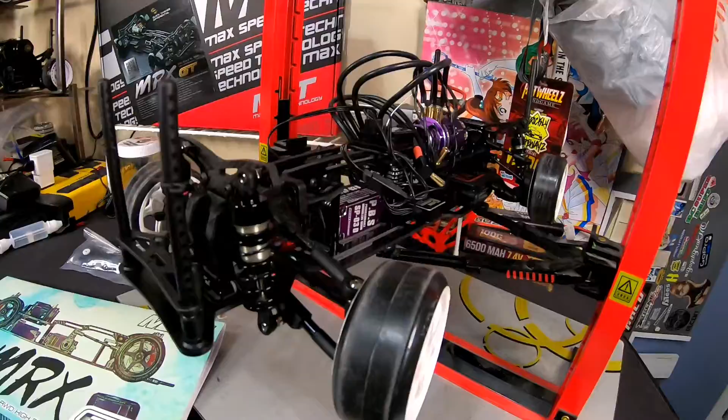You are looking at the MST MRX GT on a cool hoist that I just got in a trade - should talk about that later, but right now this is a Constructor's Digest, and I'm going to dive into the manual and talk to you guys about the build, give you tips and info about what you should look out for and stuff that they forgot to put in the manual.

I can tell you this car from the shakedown video, this is it, fresh off the track, and it's so good. It is so good out of the box. Everyone needs to drive it. It's just so good.

So we're going to talk about that, and I'm going to point out things on the chassis, and if I have to take it off the hoist I will, but hopefully I won't. So with that, let's dive right into the manual.

First thing you'll notice is the manual looks really good. I really like this, they really went to great lengths to make that look really nice. Okay, so MRX GT manual.

Okay, I'll open it up. Move stuff out of the way here. So here we get an exploded view of the car right away, which is pretty nice. You can see everything that's going on the car in terms of what goes where and part numbers and all that stuff. So handy. Tools you'll need.

These are tools they give you. This is stuff you should have in your toolbox, especially this guy - very handy. So anyways, if you don't have those, go get them.

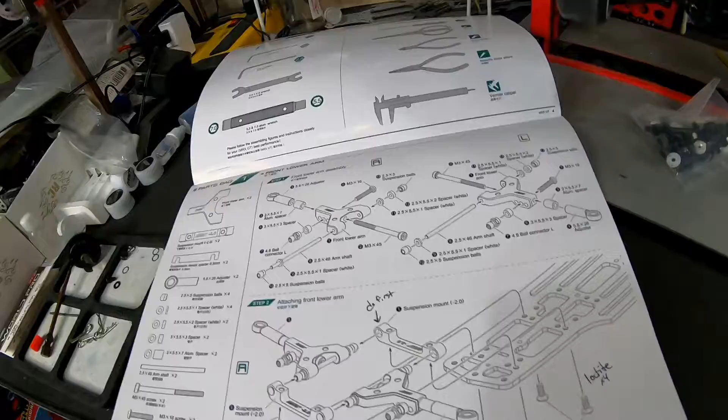First page, parts bag 1. We will start building the car here, and you can see there's a good amount going on, but just take your time, don't rush it.

What I will tell you is these spacers here that just say spacer, those are the black ones, and the ones that say white are obviously the white ones. Just want to clarify that, and definitely check here in the lifelike diagrams for the right parts for the right spot, because it's very important you put the right things in the right spot.

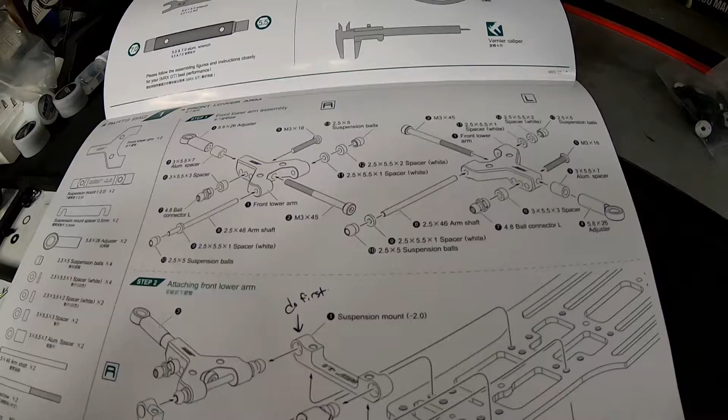And they have put things into numbers here - see the numbers, these black numbers? Those are the numbers you should assemble the parts in. So front lower arm, screw, spacer, ball cup, so on and so forth. Yep, that's that, pretty straightforward.

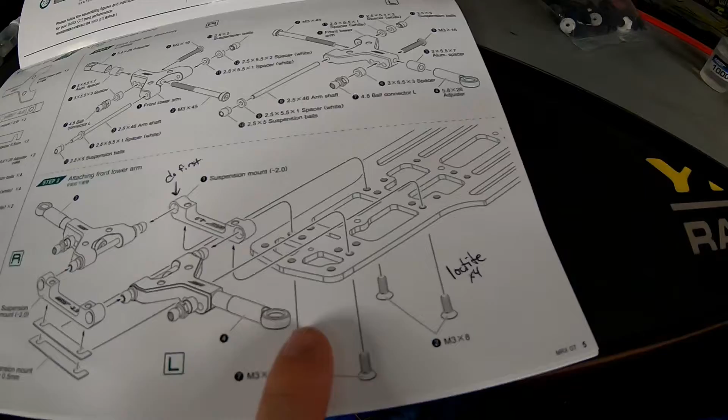You might want to put - I forgot to write it here - but you might want to put some Loctite on that screw and that screw so that those ball connectors don't come off. When you go to attach the lower front arm, do the back one first, install that first, and don't forget to Loctite these screws because you're going into aluminum, so that'll keep them from getting loose and coming out. It's a good idea.

And a trick to do the shims for here, the two 0.5 mil shims, put the screws into it with a few threads, and then slot those in once the screws are in. It makes your life a lot easier than trying to hold it all together and screw it in.

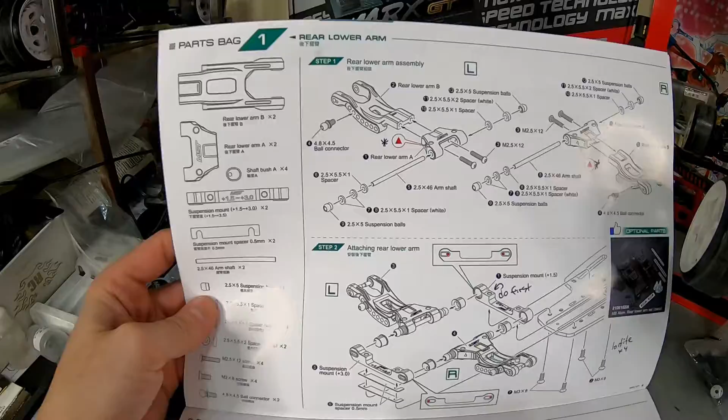So then we come to - we're still in parts bag 1 - and we're here at the lower arm assembly. There, that's better. Lower arm assembly, and we can see that there's more going on here. So a lot of the sort of same stuff from the front arm.

There's my ring lights. Actually, I'll put this down - that doesn't look that good. Yeah, so that's that, where are we here?

Make sure you pay attention here for this stuff, because certain spacers need to go in certain spots. Now these pieces came stuck together with their two-piece. If you pull them off to take a look or whatever, or put the adjuster piece in there, which we don't need right now, but you can put them in.

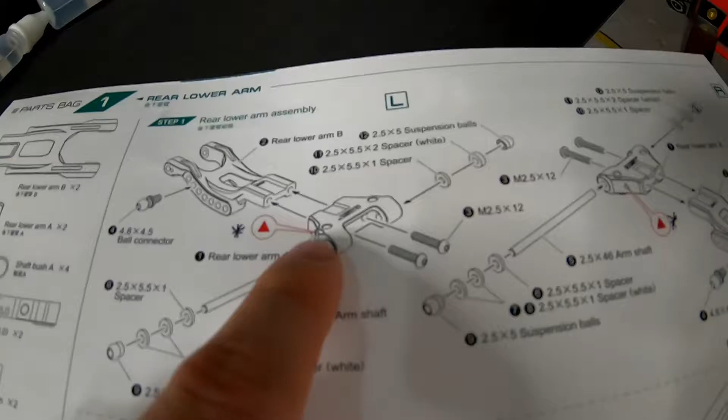This piece here, see that triangle? It's on the side there. That triangle looks like that, on that orientation - that's how you can tell which way is correct orientation for that. So in case you get that messed up, put those screws in first, 1, 2, and then there you go.

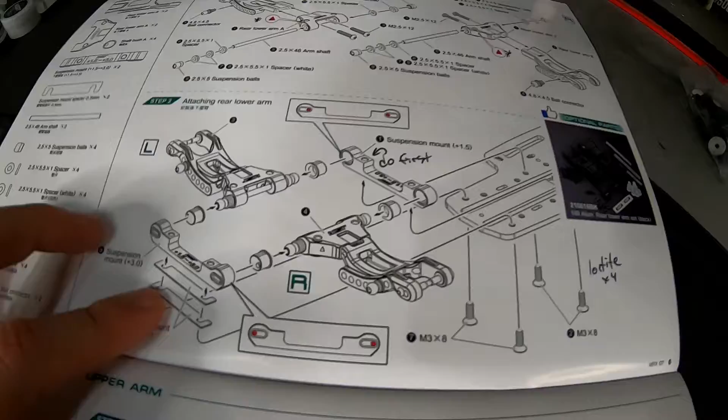Same with that side. Once you get those assembled, move down to the rear lower arm and do this one first. Don't forget to Loctite them all, and same with the shims here. Take your time, just put a few threads in, then slot the shims in after. Makes your life way easier.

Take note of the dots on this part, the shaft bush. See that little dot there? You'll want the one with the dot, not the one with the long line, like the minus line. You'll want a dot, okay?

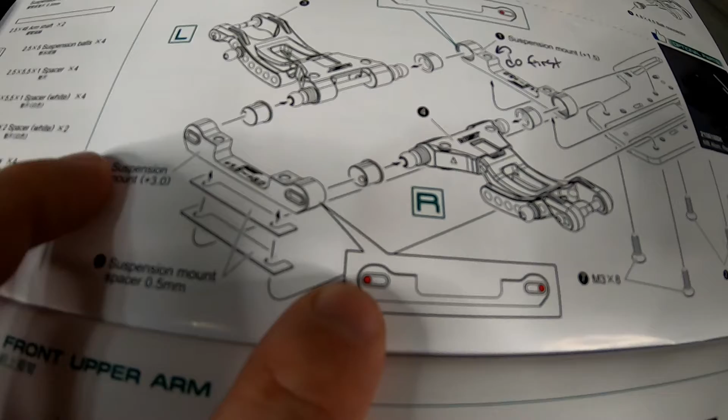On the frontmost rear suspension mount, this one that goes here, see the dots? You'll want them inward. This dot represents where the hole is, so we want the holes inward on this side for the ball stud. On this side, you want them on the outside so the arm is pushed outwards. Just take note of that and you'll be fine.

Easy peasy. Parts bag 2, the front upper arm assembly. So here we go, assemble 2 of those, measure that in between 11.3 millimeters, and you're good to go. Make 2 of them, shaft bush, okay? The arm shaft bush, pay attention to the hole and the dot.

Or sorry, the arrow and the dot, that is the orientation, okay? And back here, just pay attention to the holes, where they line up. So just go slow and pay attention to that, and you'll be fine.

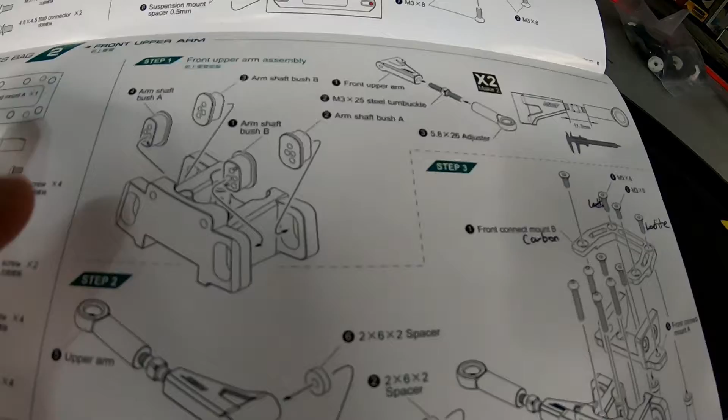This part, when you put the pin in between here and here, I just took this part and stood it up end on end and slowly slotted in my pieces. Put that on first, then the arm, then slot that one in, easy, and away we go, okay?

And here I made some notes. This brace is a carbon brace, which is really nice. These are aluminum posts, so put some Loctite on those 2 into the aluminum posts, that's what I like to do. Okay, and that's that, pretty straightforward.

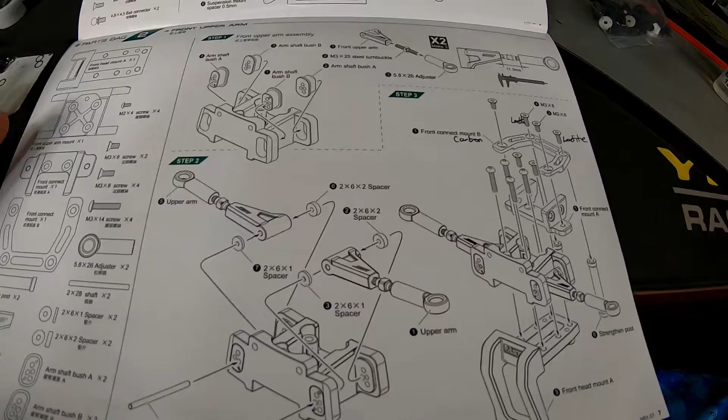Oh, and this part comes from bag 1. Now, you'll have some parts that kind of go back and forth, but they will tell you what the deal is there, okay? So that's that.

Now, steering arm assembly. There's not too much going on here, but it does look like it. They're all ball bearings, make sure to put some oil in them wherever it says ball bearing, okay? And make sure you orient that correctly, the screw holes. Put some Loctite on that screw for the ball stud so it doesn't come out. The rest of the stuff you're screwing into plastic, so that's okay.

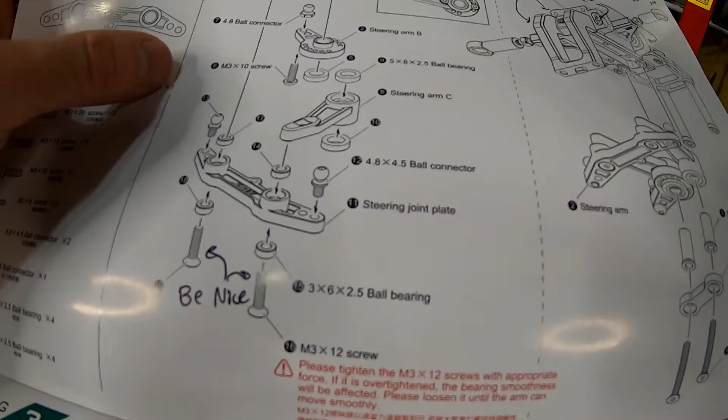With these screws, I wrote 'be nice,' so be nice on the torque into here. Just barely snug them up, because you're making threads into plastic. So make simple threads, don't use a power tool, just go by hand and make nice snug threads, because you don't want these too tight on the bearings or it won't move freely, and you need this to move nice and freely, okay? So just make it snug so the bearing moves nice and freely. You're good to go, that will be good.

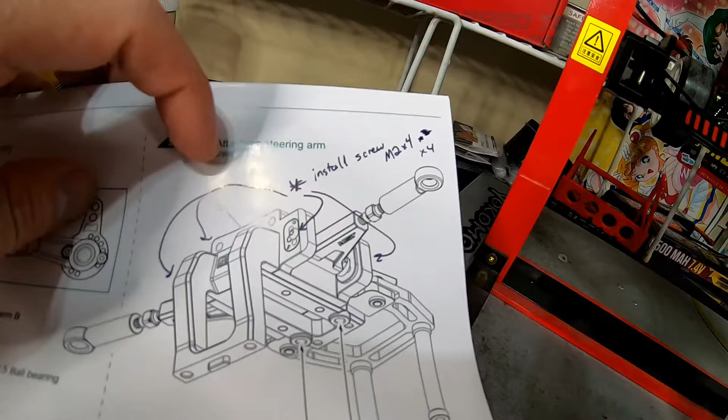And here, I actually noticed that MST forgot to write on this bulkhead assembly to put the 4 M2x4 screws here, here, and on the back side of the pin there, and on the other side, okay? So don't forget to do that, or those pins on the upper arm will come out. I've seen it happen. So yeah, 4 screws there, you go.

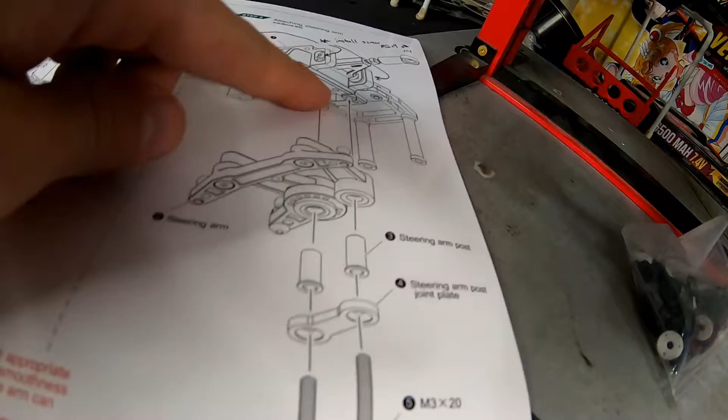When you install the steering rack with these pieces and these screws... oh wait, no, this is going into plastic, so again, screw it in nicely, nice and snug, and we should be good. If that was aluminum, I would say put some Loctite on it, but I don't think that's actually aluminum, let me just check. No, that's going into plastic there, so that's fine. But this is aluminum, so put Loctite on there on the other side, and then yeah, we're good to go.

And here, this is what I meant. So you see in there, that slide rack, or that steering rack part right here, this part. Yeah, so don't tighten that too much, okay?

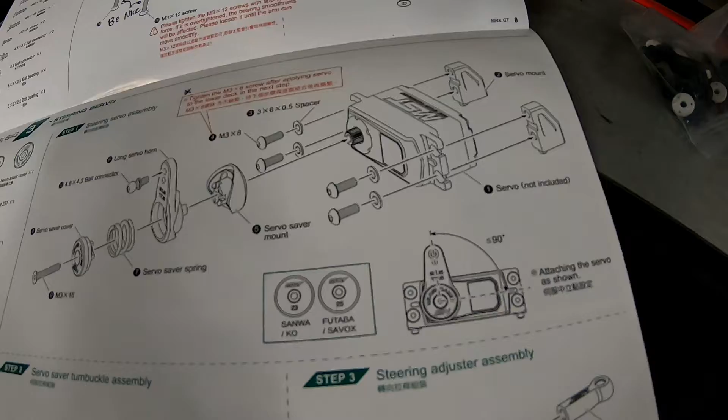That's that, okay so here we go. Straightforward servo saver, which works really good, so go with it. It does work really good. I like it so far, this new version MST one.

These screws, when you go to put your servo in, leave those a little bit loose so the servo has a little bit of play, because you'll want some play to pop those mounts in, and it'll set the servo between the mounts nicely, then you can tighten those up. I made the mistake of tightening these as tight as I could, close to the servo, and I was like, why doesn't it fit? I could see I just had to move the servo over a bit, so I loosened both, wiggled it until it popped in, and then tightened all the screws.

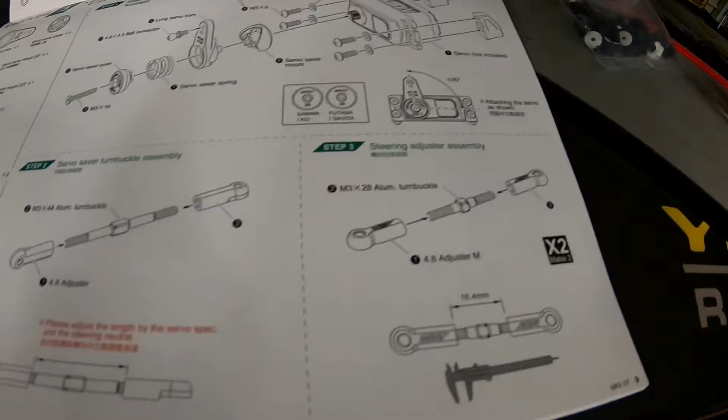We're good to go. Then down here, make your servo saver turnbuckle and the steering adjuster turnbuckle, the tie rods basically, and the big guy right there. Those are straightforward. You'll have some extra screws, I noted 2 extra, and some extra bits throughout. That's normal, just make sure you double check each step and don't rush.

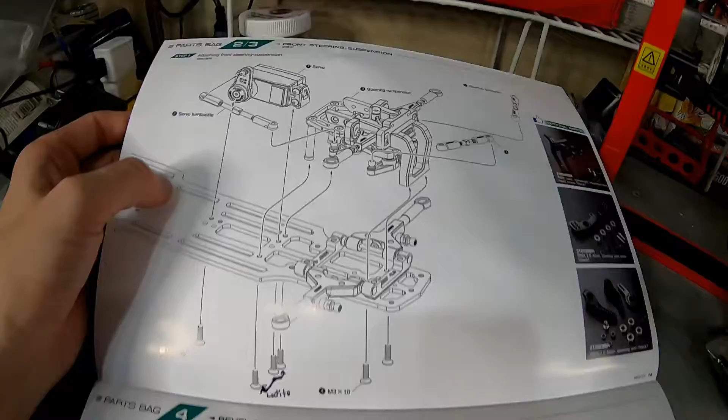Front steering suspension install, that's where the servo goes into those holes. So like I said, leave these screws a little bit loose and it'll fit in there nicely, then tighten that, and install the front bulkhead with steering. Install all the screws into plastic, straightforward, and the 2 that go into the aluminum posts there, put Loctite on the bottom of those and you're good to go.

Install your steering turnbuckles. Okay, good to go, love it.

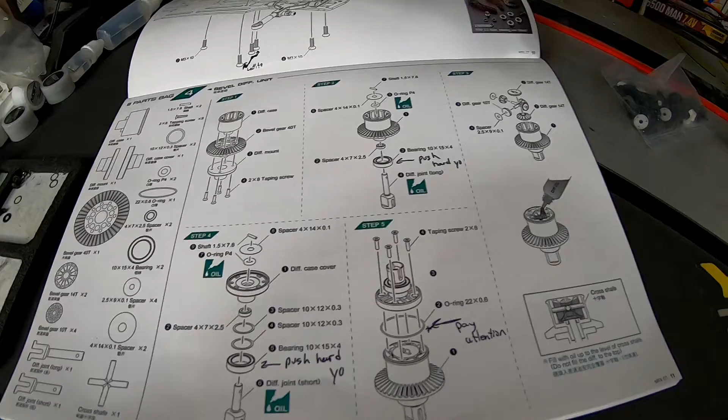Now the diff. Some other manufacturers pre-assemble the diff and you just put oil in it. MST wants you to build it so you understand it fully. And it's pretty straightforward, and I will use that phrase quite a bit.

Just pay attention, this all clips in. These screws are self-tapping, but they also require a Phillips screwdriver, not an Allen head. So they require a Phillips, or some people call it the star head. It's a Phillips, okay, and you'll need a PH1 Phillips for that. Just go slow and they'll go in no problem.

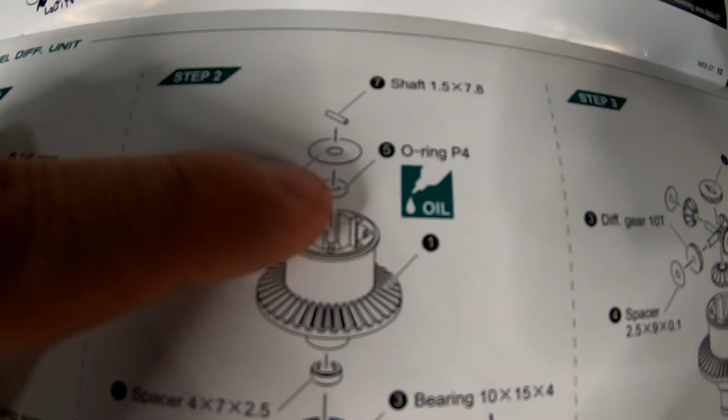Don't forget to put some oil on that O-ring before it goes through the shaft. This is where you'll press the diff bearing onto the housing. I wrote push hard, yo, because MST's tolerances are quite good, so that is a nice firm fit.

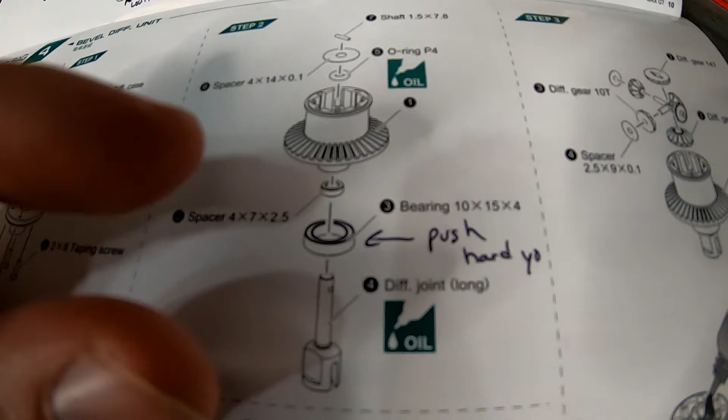Just make sure you push that as far as you can get it, push, push, push, get it on real nice, because I didn't have mine on as far as I thought they were supposed to go, and they wouldn't fit in the diff case until I gave them a little more push, squeezed them on. Then my diff fit in the diff case nicely with nice tolerance. So just remember that.

So this is where you install the gears with the bottom bevel gear. Don't forget to put that spacer in, you can use pliers to do that because it's tight in the diff housing. And don't forget these shims on all 4 of those gears, not that top gear, just those 4 gears.

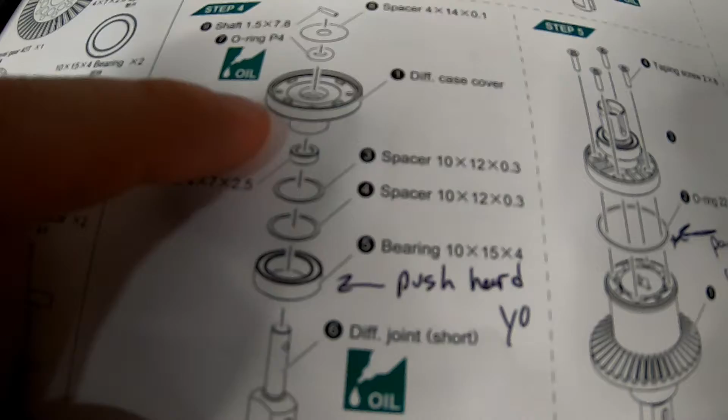Here's a little tip, when you're doing this part, again push hard, yo, same thing, push hard in the same spot. Note the spacers and oil on that O-ring before it goes through the shaft. And the pin, you can put a little bit of oil onto that pin area and stick that top gear onto there, so when you flip this part onto the diff, it'll stay there a few extra seconds and go right in.

It's mint. And when you put this ring on, pay attention. Put this part on slowly and make sure the diff ring is sealed nicely in there and fits in there nicely before you put the screws on, or it will spit out the side. It happened to me, I thought I had it all in there. So just take your time with that ring and make sure it's on there nice.

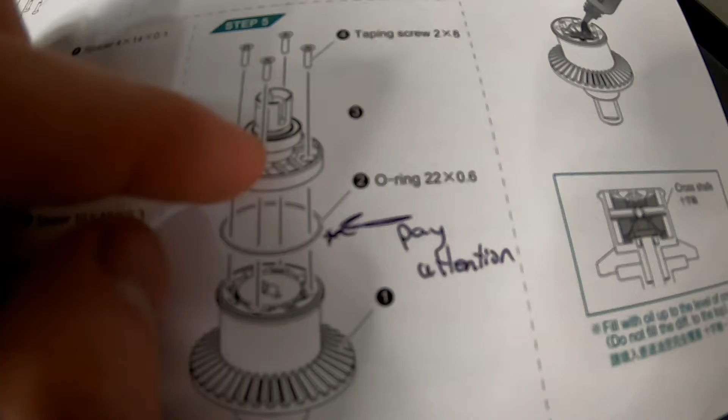Your diff won't leak, because I don't think mine's leaked yet, or at least I'm going to check it at some point in the quick release section and we'll see. So just take note of that.

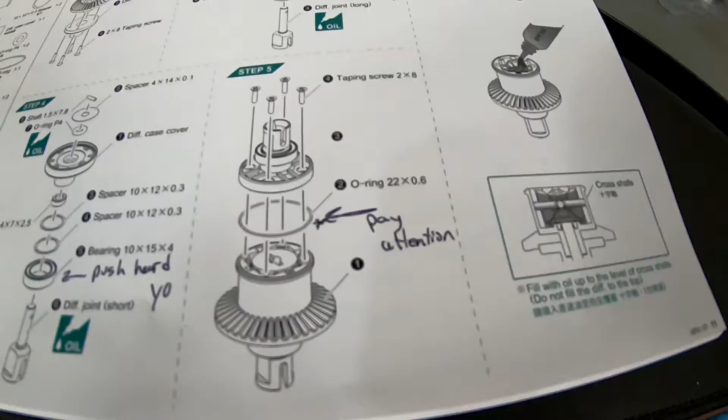Don't rush it, okay? Oh, hold up. So when you do these gears, do these gears, and then do the oil fill. I forgot to mention that. Fill it with the oil up to the amount they're saying here, okay? Don't overfill it. And then prep this, because any bubbles will kind of work themselves out of it. Prep this, do your thing, and then put that on with the O-ring. Just take your time, and make sure that's filled with oil before putting that on, okay? I missed that part. Gotta make sure I get that.

Now, where are we here? Ah, the rear gearbox. Yes, I enjoyed doing this. This was cool. This brought back classic MST gearbox memories and all kinds of cool stuff. So this is where the real FD fans will really love this. And if one of my friends is watching, he's gonna want this on his car, and it won't fit, but he wants it anyway. I don't know, but it's pretty cool.

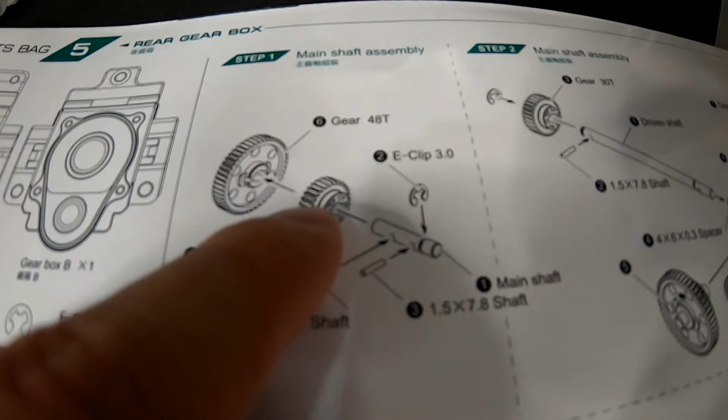So take your time. There's 2 different length shafts here that they want. Put the E-clip, first gear, that little shaft, put the first gear against the E-clip, and then put that second gear on that second shaft. Now they said it on the other page, assemble it in the order of the black number. So 1, 2 E-clip, 3 pin, 4 gear, 5 the shaft, 6 that gear, okay? And then here, shaft, pin, gear, E-clip, bam. And spacer on the other side.

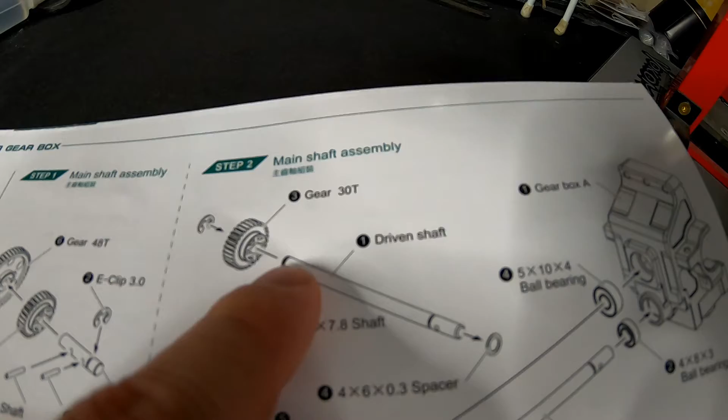It goes up here, okay? So it goes behind that gear. And then you will grab the beautiful aluminum rear of the gearbox, or front rear part of the gearbox. Gearbox A, yeah. And you will take this assembled gear piece, stick it into that bearing, into there. When you move your thing around, this might fall out. That's okay. There's nothing holding that in. That just sits between the motor mount and the rear gearbox, but on bearings. So don't worry if that pops out.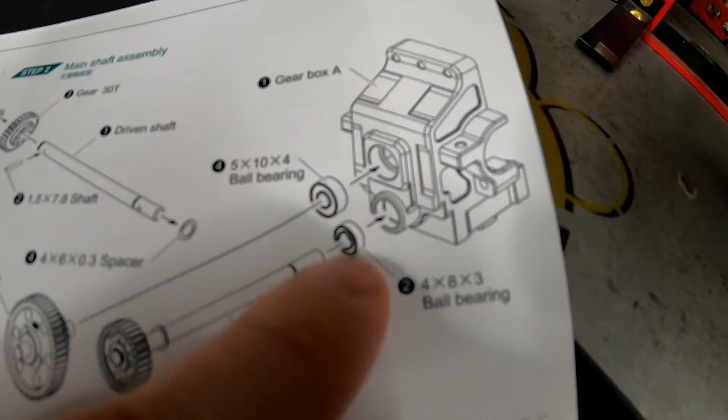And then take your shaft with the spacer and put it into that bearing, and those bearings are different, as you can see. Bring this down to here. This is where you install the diff, and make sure again that these bearings are pushed in. Pushed in as much as you can, because the tolerance here is very tight, and I like that. The MST's tolerance has always been really really good. Make sure that's in, because mine just weren't in, like half a millimeter. Got pushed hard, got them further in a bit, and then it just, oh, it went right in. So that was nice. As you can see, there's that shaft sticking out. That shaft goes all the way through there, which is pretty cool. And then

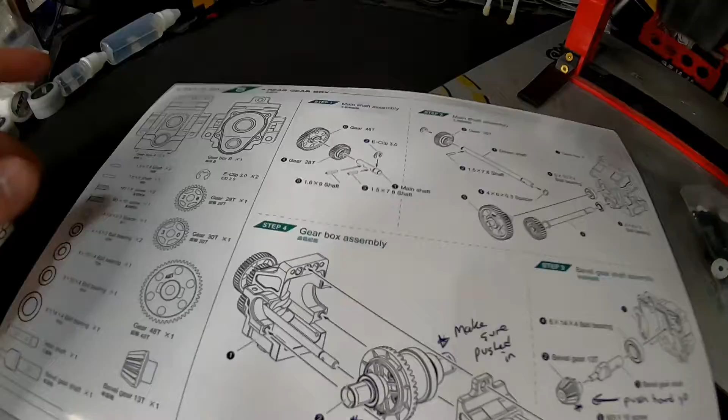So we go from here, sorry, to here. My bad, Jeebus, I wasn't paying attention to the step numbers. Excuse me. We go from here to here, okay? Because I was like, yeah, where'd that shaft come from? There to here. Plastic gear, this shaft, which I've seen before on, I think, the MRX 2s, and that bearing, put the bearing in there.

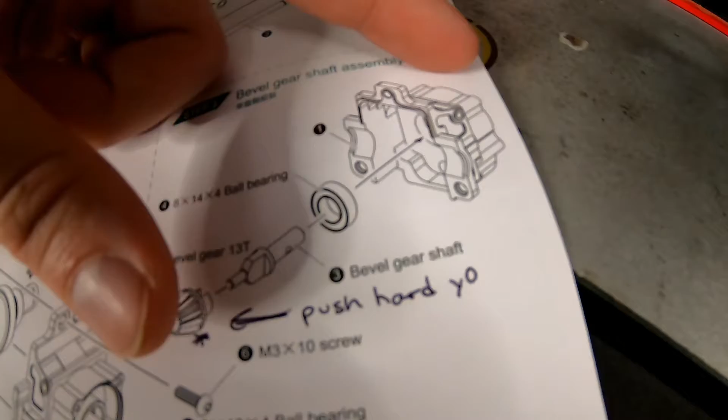Now, this plastic piece, push hard, yo. Push this, because it'll only go so far into that shaft, but push this as much as it'll go onto there, and it'll go inside the bearing. Make sure this is flush against that bearing. Push it hard, yo. Okay, once that's in there, you should see that this is protruded enough, and then take this, and this is this assembly, and install your diff.

Okay, Loctite on those screws. Whew. Excuse me, I had a little burp and a yawn all at once. Oi, I hate it when that happens. Okay, so I was saying Loctite times 3, 1, 2, 3.

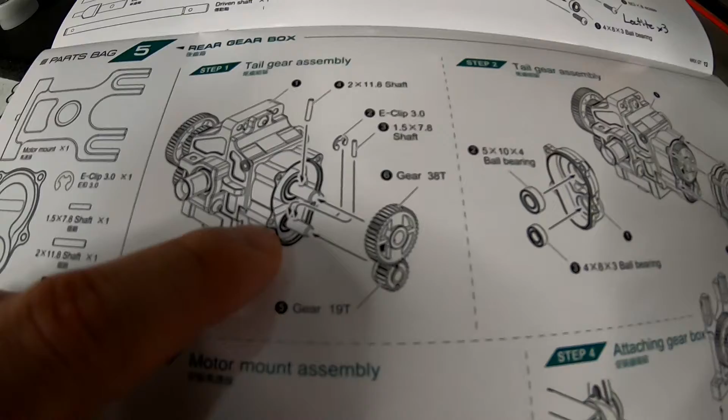There you go. Now, to finish the rear part of the gearbox, the tail gear assembly, you will take an E-clip and a pin. That E-clip will go through that shaft. Make sure that the gear up here is pushed all the way into that shaft.

I wanted to do the E-clip first, which makes more sense. That little E-clip should go right on, then that mini shaft goes in there, mini pin. The gear just slips on, slides right over the pins. Then there's that big pin, they just pop on.

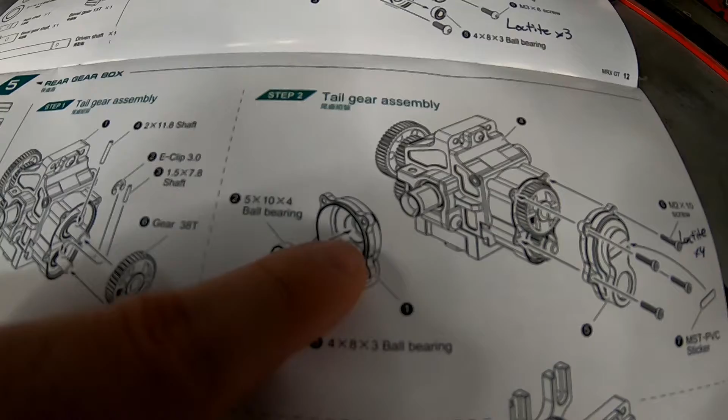And you put 2 bearings in there, put oil in them, and then those screws, Loctite, and the MST PVC sticker. I'll tell you, use the MST PVC sticker, just put it on.

I know some of us think that there might be protective film on all of them. There wasn't, and I tried to peel it. Can you see the little nastiness around the M? Because I lifted the PVC covering, and that's not a protective layer. Anyways, I can always get another MST sticker, but don't ruin yours like I did. There's no protective film on that, so just put the sticker on and leave it. It'll be mint, just take it off of its little sticker sheet. Anyways, that's that top tip from me.

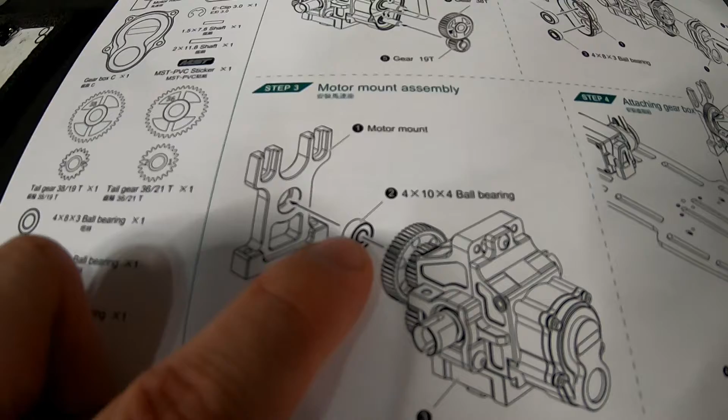And there's that ball bearing that goes into the motor mount. Yay, look at the motor mount, it's happy. Hands in the air, woo. And then that presses against that, as you can see, all one.

And 6 screws to mount the beautiful FD style rear transmission with quick change. Put Loctite on all 6 and it won't fall off the chassis. It's one of those that ain't going anywhere type things.

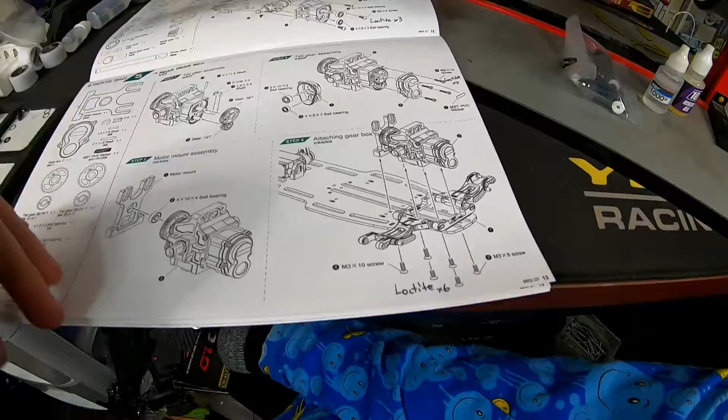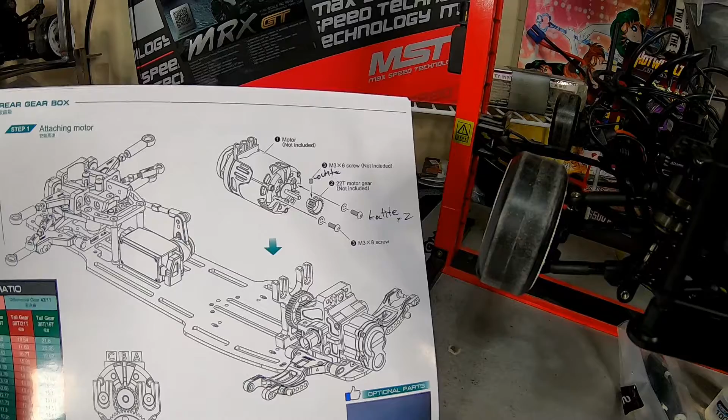You don't have to put it in right away, but there's that. But the pinion gear is not included. Ugh. But the motor screws, Loctite them twice, and that pinion set screw for the pinion gear, when you get it, Loctite it. No motor gear included, no pinion gear. I was like, oh man, come on, seriously? But then I'm like, there's so much other sweat on this car, and it does drive so amazing.

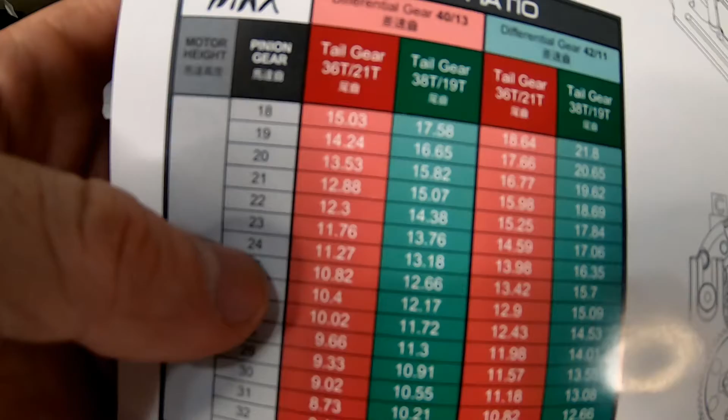I'm like, yeah, alright. So I bought a 24 tooth pinion for it, 24 tooth, and there's the numbers, so that's what we're running with.

And I'm pretty sure the 4013 diff gear, let me just go back. Where's the diff? Let's verify the diff number. Diff 40 tooth, and the ring gear, what's that, 20, the ring gear is a 13, so what's that, 4013, 40, 13. So that's the default, that's what we're running.

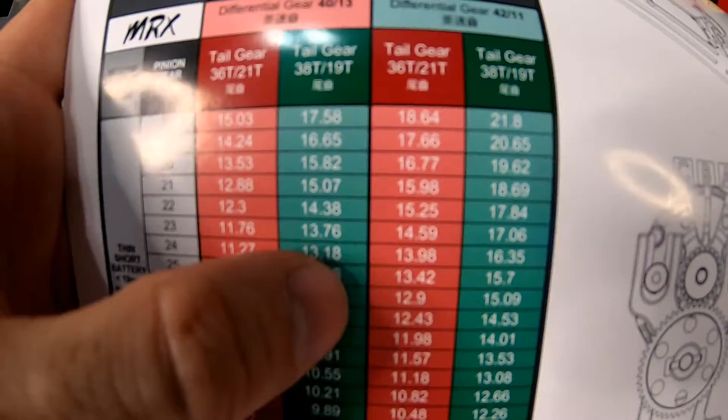24, 11, 27, 13, 13, 18. Yeah. So, you can run some math if you want. But make sure you set the mesh properly so you don't strip the gear.

That's that. Moving on. Upper deck. Carbon, carbon, love it. Aluminum, that's aluminum. We knew that. No, sorry. Yeah, that's an aluminum piece. It's right there, right there. Yes, that's aluminum, these are carbon.

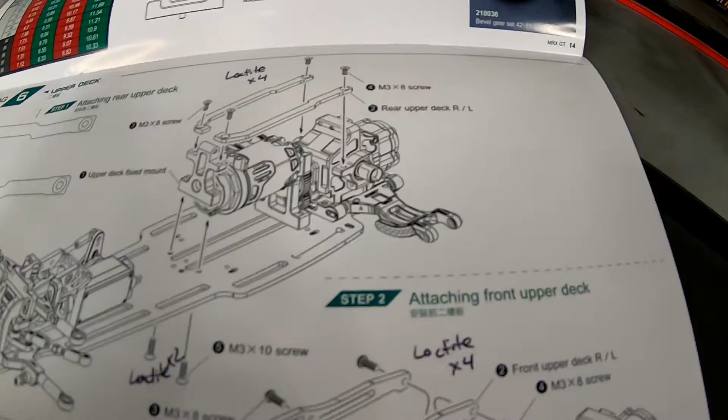Loctite all 4 of those screws because you're going into aluminum, so it makes it strong. Loctite those 2 because they're going into the bottom. Okay, and then Loctite all these screws and screws and screws, so that it makes the upper end nice and strong. And that was really nice. Look at that, look how nice that looks. Oh yes, so definitely do that.

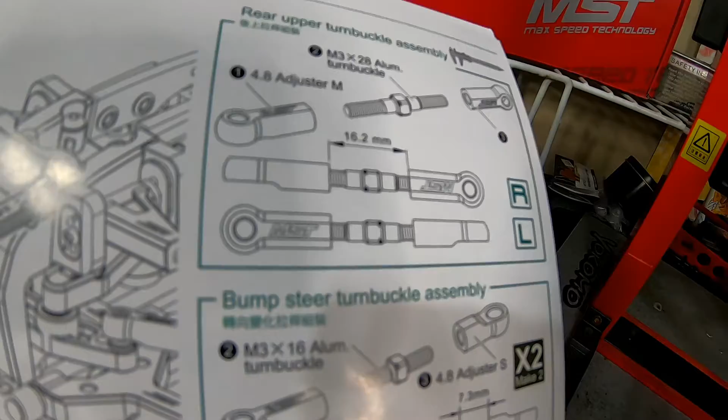Upper shock tower, make sure you Loctite on the screws for the ball studs, straightforward. Your links, straightforward, get the measurements right. 16.2 for the upper turnbuckle assembly, and the bump steer, which is the rear active toe. That's 2 of those, and you want 7.3 mil between those. So that's that.

Let's see, where are we at? Oh, rear, yeah, the rear shock tower. Oh look, they did the silly thing again, dmaper.

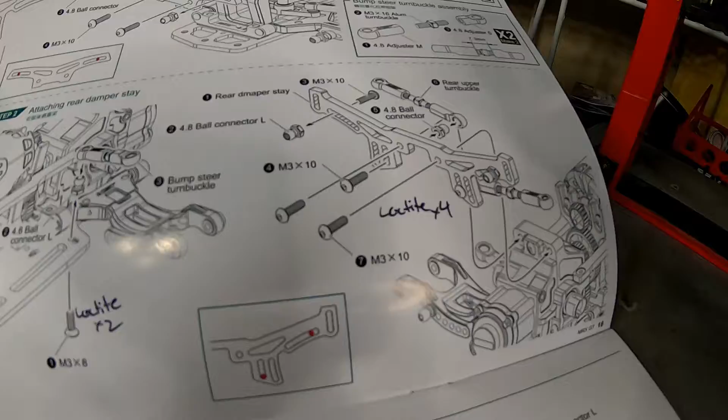Oh look, rear dmaper again. Front dmaper, yes. Silly grammatical errors, but that's that. Loctite on that screw ball stud, Loctite times 4 actually, because it's going into all aluminum, and those ball studs you'll want Loctite on, and Loctite this screw for that ball stud so the rear active doesn't come loose on you and start doing funny things.

Excuse me, I'm scratching my elbow with the camera on it. Okay, yes, that's that. And attach those balls.

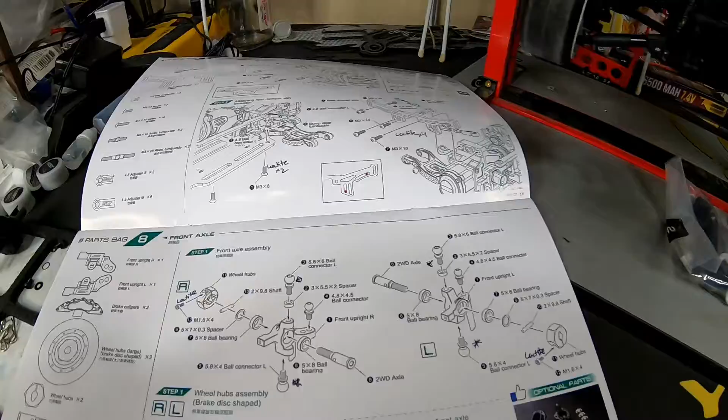Never mind. Front axle, parts bag 8, that was parts bag 7, this is parts bag 8. Sorry if I missed a parts bag here and there, but you get the idea.

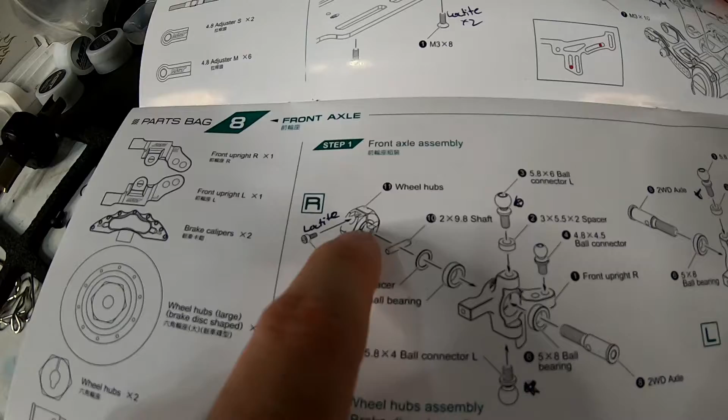Front knuckle assemblies, yep, ball studs, and there's ball bearings, put oil in them, the spacer, and don't forget that Loctite, that little screw for the wheel hub, which is the aluminum one, sorry, which is nice, use that. Here they give you the disc brake ones if you want, and they tell you how to install that if you want, but I went with the aluminum boys. Those are nice. I don't really care about the scale look on this car, and if anything, I'll get the aluminum ones, but do that. Loctite there. Now make sure you pay attention to this.

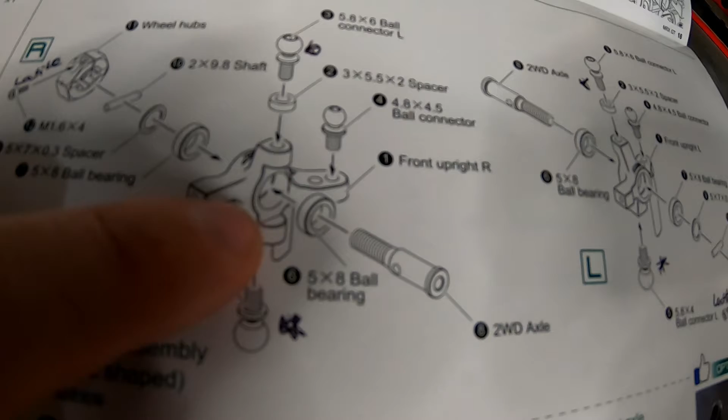5.8 by 6, 5.8 by 4. If you put the 6 in the bottom, you're going to protrude and get a little plastic dome, which then you'll have to fix by shoving the bearing in or whatever. But don't do that, don't do the wrong 5.8 by 6 ball connector. Use the 5.8 by 4, which is the shorter one from the bottom, 5.8 on the top.

Same over here, okay? Loctite that. Because I made that mistake and I was like, oh. So I fixed it though, it was not too hard to fix, but that, and then you take your assemblies and pop, okay, install them, away you go.

And these ones here are beveled, so you'll be able to put them in easier one way than the other. Same with the shocks, for that matter.

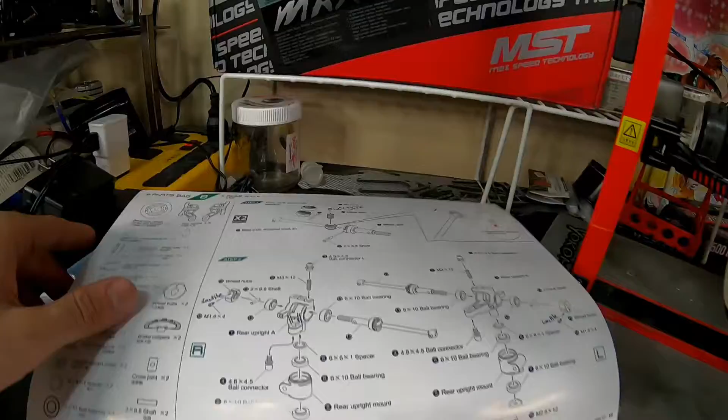Rear axle assembly, can you see that? Yeah, I put Loctite in big letters, I don't know why, I just did, because make sure you don't forget to do that. And put some black grease if you like, right there. Make sure you put the set screw on the flat part of the shaft when it goes in, and you're laughing. And then that's for the shaft, rear drive shafts.

MST makes you assemble them. Most other manufacturers pre-assemble them for you. But MST wants you to know, they want you to learn. So that's that. Rear axle upright.

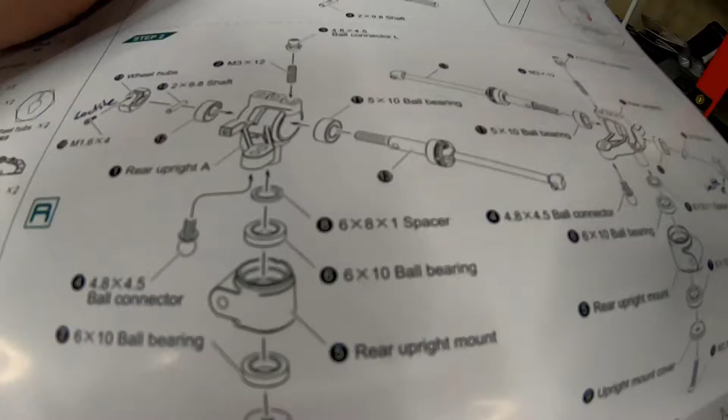These are the knuckle/uprights. Pay attention to the ball bearings and spacers, okay? Ball bearings, put oil in them. They do come pre-oiled, but you can put more. Loctite on the wheel hub, that's the aluminum one, very nice.

You can do the brake discs there, they'll show you, and you don't have to, but they make an aluminum one. Very cool.

Yes, and then, yep, what else? Throw a little Loctite on there for that ball stud. I forgot to write it, but it's a good idea.

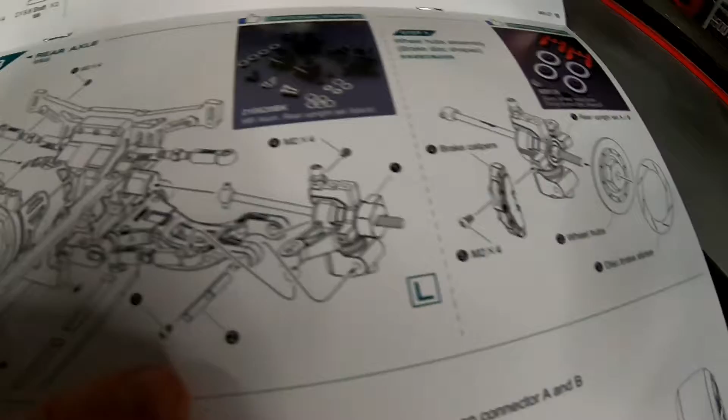And then when that's assembled, you bring those assemblies down here. You pop there, and on the other side, pop. Put your pin in and put your screw right on both sides of there in the pin. Away you go, straightforward.

And once we get here, we're getting pretty close to being finished because this just explains the bump steer there. Because the next part is the shocks. And after the shocks, yeah, we're like 90 to 95% done. So I say this is about 80% when you get to this point.

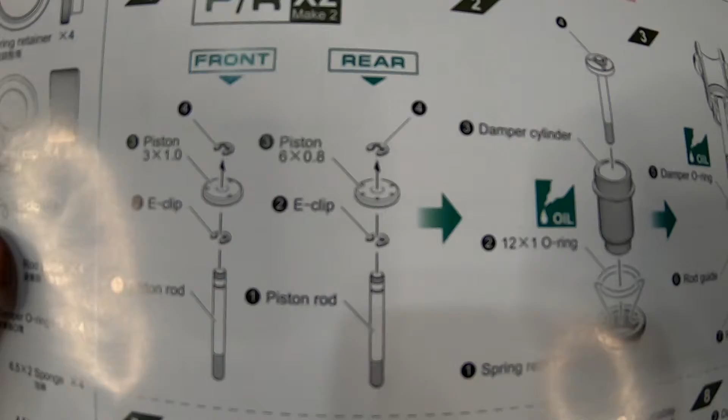So shocks, they have front and rear options, and I'm so excited to tell you that there are 6-hole pistons as standard for the rear of this car, which we're into that life now. 6-hole pistons out of the box, or in the box or whatever. So they want 3-hole pistons up front, 6-hole in the back. Okay, 2 and 2, front and rear. Now, all 4 of them, you will do.

Oh, excuse me, I burped and yawned again. What kind of combo is this?

O-ring, there's O-rings provided, all this is provided. Put the O-ring into the retainer, put a little bit of oil on it, so when you strut it onto the body, it goes on nice and easily.

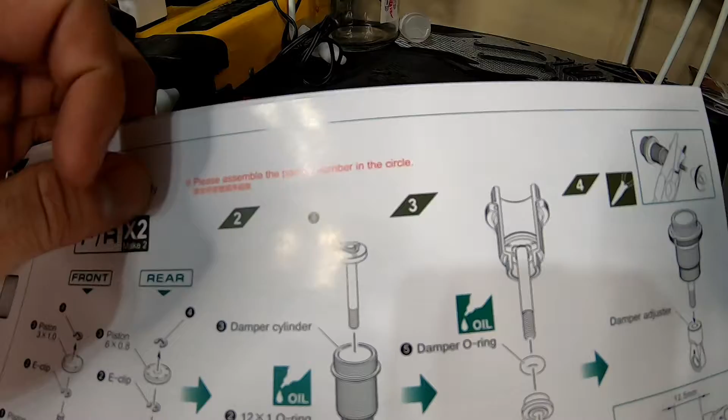Once you do that for all 4, put the piston assembly down through. This up here says please assemble the part by the number in the circle, so that's the little black numbers. That helps you a lot, so you know which to do first.

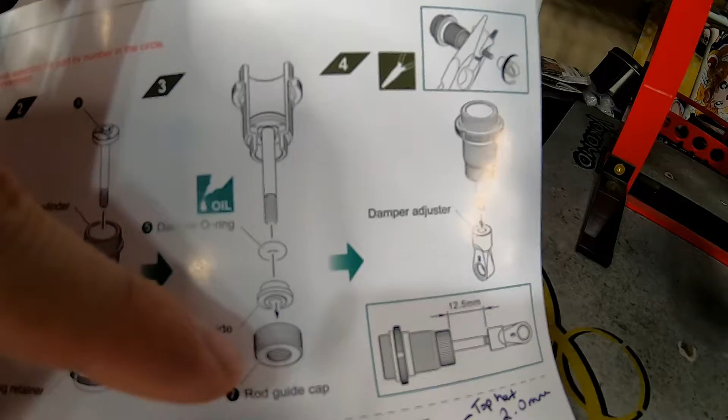On the bottom, when you get the piston in, take your O-ring, put some oil in it, and then push it through the threads. Do it slowly because the oil will help it go through without cutting it. Get it in there, put a little oil in the bottom, and then put the rod guide and seal it up, the rod guide cap. Don't use Loctite though, just tighten it with your finger, okay?

Here they show using pliers to hold the shock shaft for the ball cup. If you have your shock shaft pliers set, which I have but they're not out right now - shock shaft pliers are the best because they don't have teeth and they can just clamp the shock shaft. That's ideal, but that's what you do if you don't have them. You can use side cutters on the top thread and put the side cutter in between the top thread. That works as well, it's an old school method.

Measure that 12.5, like that. I did, and use the ball cup with the number 3. And of course they tell you all the parts to use over here.

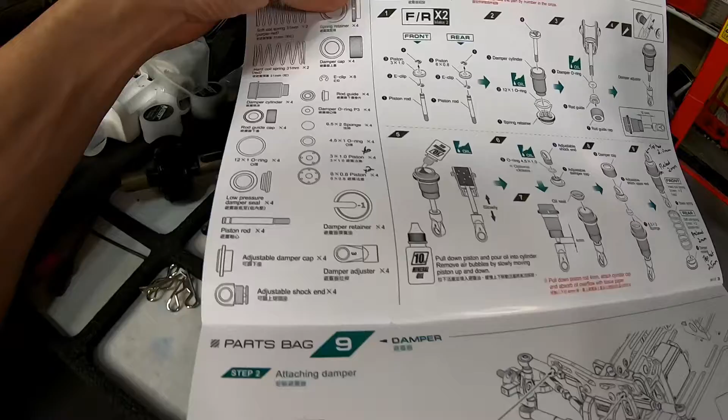After that, I'm gonna fill it with oil, and then slowly move the damper, or move the shock shaft up and down to get rid of the bubbles, or to vent the bubbles up to the top. There's going to be a bunch. Let the bubbles go up to the top, let them sit 5 to 10 minutes, they should be all gone. If not, you can maybe just dab them with your finger or with a little bit of blowing. Sometimes that works, they should all come out.

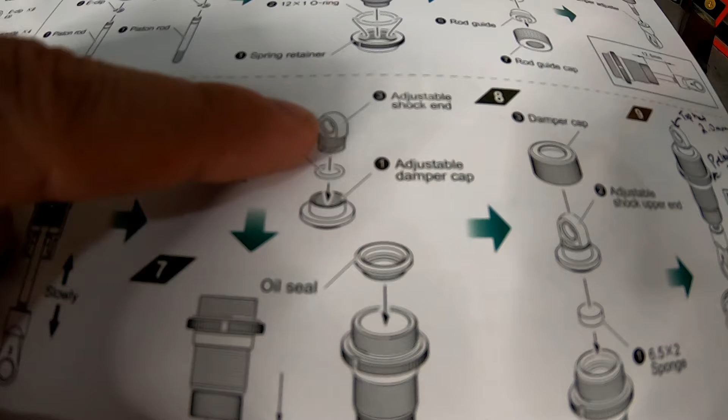After that, I did these ones this way. So I installed my oil cap, the adjuster cap, into the top hat. Make sure that O-ring is pressed into this top part really nicely so that it seals in there good.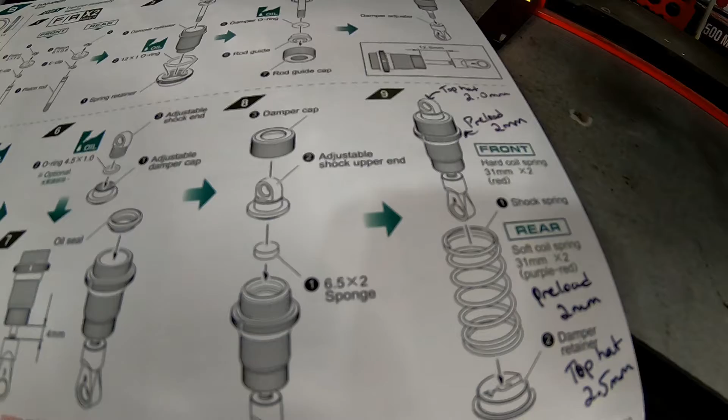Then take this oil seal and put it on there and do it on an angle down. The oil should bleed out, just sop it up with a Kleenex or whatever, and then put the sponge, and then put your top hat and damper cap and screw it down. Most of the oil should be bled out by you putting on the oil seal first, and the rest will kind of come out of the top a little bit if it does. You shouldn't really have to take it off and on more than once or twice, but if you do, it's okay.

After that, hard coil spring for the front, that's the red, they've marked it red, 2 for the front. I've written some bits here that weren't written on this part but are in the MST, the setup sheet, which is the factory sheet, which is all this. So they had it over there, but not here.

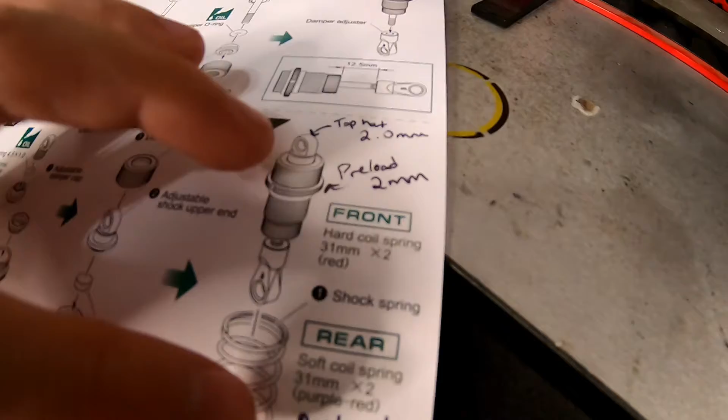But they didn't have preload, so I found that it looked like about 4 mil preload, but then a little bit of quick testing and 2 mil preload seemed to be the jam. So I think it was 2 mil or 2.5 mil, but I think I wrote 2 mil here - go start with that, see how you feel. Preload for both, 2 mil front and rear, and then top hat here, the adjustable one, set it at 2 mil out of the 3. Rear soft coils, the purple red for the rear, and top hat at 2.5 mil out of the 3.

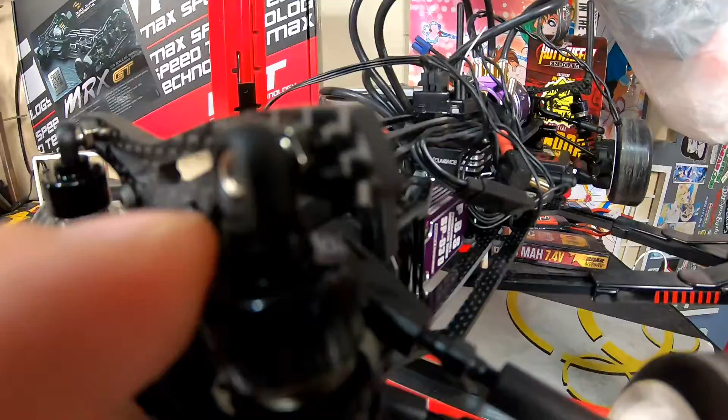And if the thing jams, so there's 2 or 2.5 mil, one like that, and then that - I'll help you out there. It was really late in the morning, like 6:30 in the morning, when I finally got this thing driving. I put the preload here but I didn't put it there - wait, no, I got it on the rear. That's the only one I didn't get, but this thing still drove amazing. So I gotta fix that though, just noticed that, but that's funny. So yeah, I gotta fix that and put the 2 mil there.

Anyways, once you get your shocks built, away you go. Install, pop, pop - now these are beveled, so they'll go on easier one way than the other. And that's that, pop, pop on the rear, away you go.

And now we're like 95% done, because we're installing battery mounts.

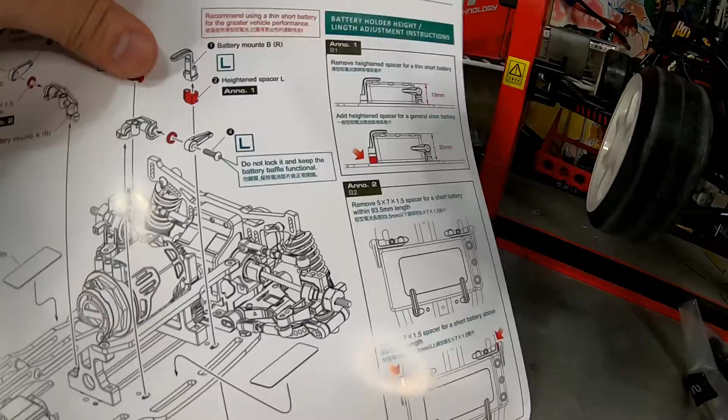Now these red parts here, if you're going to use a standard 2S shorty, because this car requires a shorty battery, you can't use a long one, you need to use the first red block here to space it for length, and you may have to use this block for height and use the red spacer for length, for the 2S style long shorty at the bottom there.

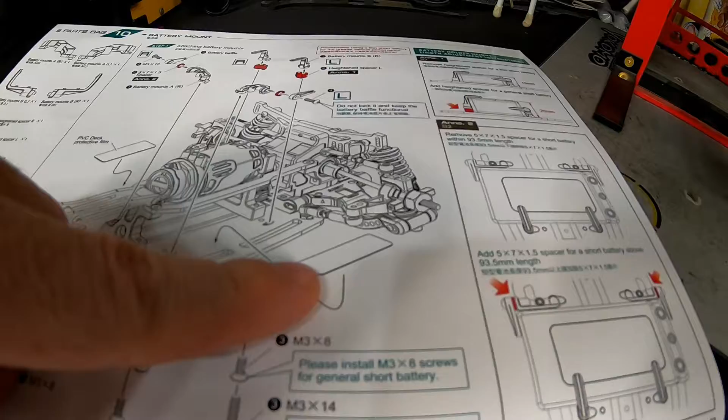If you got a slim shorty, which is a 2S battery in a 1S casing, you use the 19 mil height insulation, you don't use the red pieces at all, and it sits in there very nice. Then use the PVC deck protector to protect from the battery, so when you slide the battery in and out, that's a nice little feature.

And depending on which spacer pieces you use, you'll use certain length screws, and that doesn't take too long to install, and away you go.

So that's awesome. And don't put this screw too tight, okay? Don't put that one too tight or the thing won't move.

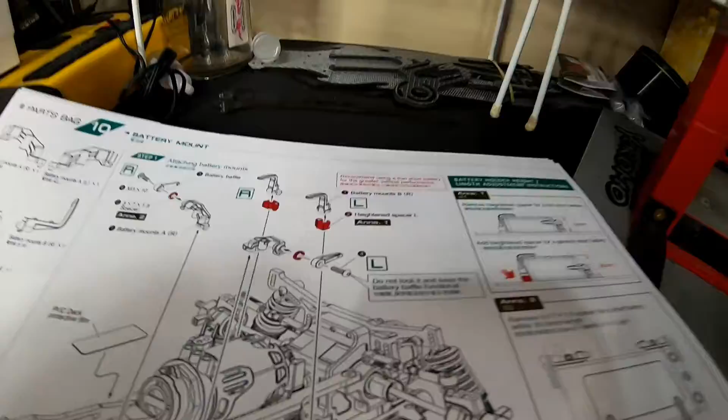And then put your battery in if you want, and put the wheels on your car, because these are not included. And weirdly, I ended up picking MST wheels for this car, and those are 8mm offset. The best part is 8mm offset.

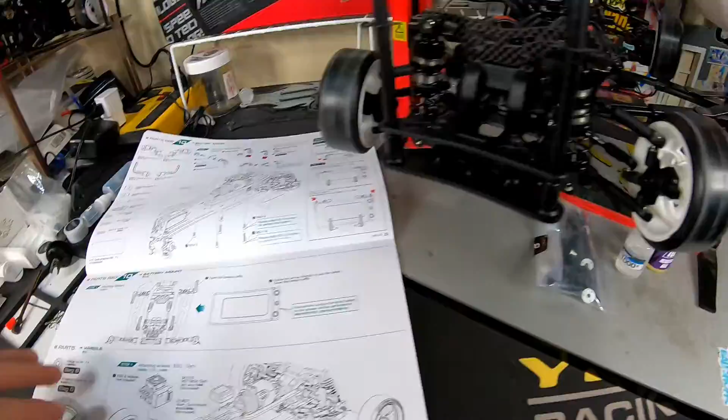ESC in factory position, gyro in my own position, receiver in my own position. I put the receiver up there, gyro right beside my ESC just for now. That worked really well. But the ESC crucially is in factory default position.

I really wanted to try out aggressive mode, which is down here. We'll get to that in a second. Once you're done the ESC, if you have it, if not, it's okay.

Oh, battery mount. Once you're done that, ESC, body post, really easy, straightforward. Just take your time, go through it, and they do a carbon bumper. And then, if you're doing magnets, put the magnet mounts on.

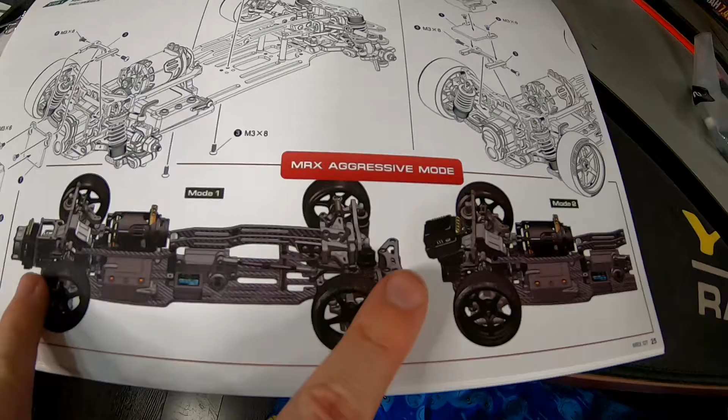Fine, but if you do aggressive mode, this is how you install it. And I believe that's carbon and aluminum, and that's aluminum, so Loctite all of that. Loctite all of that. Okay, and that's what you'll do.

Move the servo back. I really want to try that. But this thing drives so freaking good already. I don't even know if it needs aggressive mode. It has aggressive mode like 0.5 already or whatever.

But it's good. So after that, or aggressive mode, the body post, you are pretty much done. It's done, good to go. You just finish off your electronics if you haven't done it, or take a break and then come back.

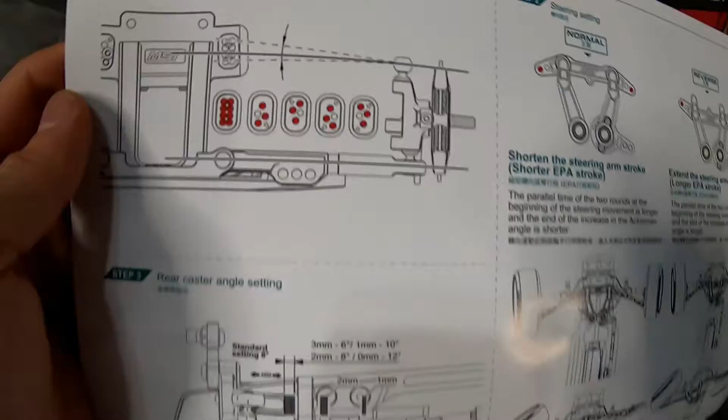And the rest of this is just explaining what different positions do, the caster angle, the types of steering settings you can do. This is the entire transmission laid out for you with the names of gears and how to do the formula of calculating the transmission ratio based on your pinion gear. That's really, really nice. This is nice.

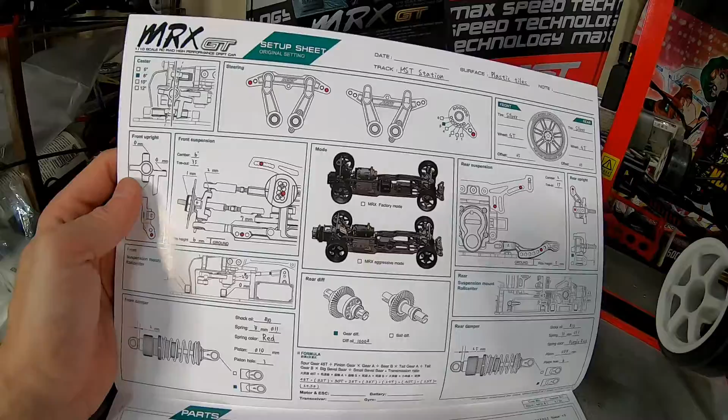And then they show you a full option guide currently of what's available. I actually have that MGX gyro, it's in some of my RTR cars, I have one spare. But yeah, there's all these option parts, and here's the option parts. MST really goes to great lengths to complete their stuff, they really do it good. So that's the original setup sheet, the out of box, everything that's set up currently on the car right there.

Except for the preload they forgot to put in, but I put 2 mil. I didn't write it on the sheet, but it's 2 mil. And yeah, after that, it is just parts.

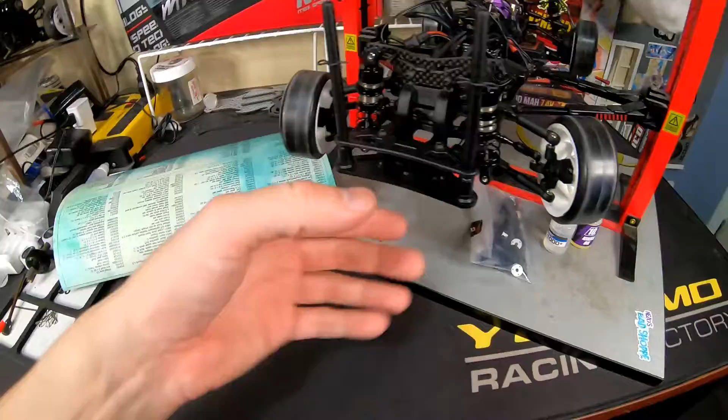And what else? Yeah, just parts included. Look at carbon - no, don't touch the car. There we go, and we're done. That's it, more part code lists on the back. That's it, the MRX GT, and I damn near want to call it a VIP because it's just so nice. And that's pretty much it.

So other than that, you will have a bunch of spare parts. Here's a total of spare parts during the build. You're gonna have spare gear set, spare shock pistons, screws and this and that here and there, one of the servo saver pieces, rear arm length adjuster pieces, lots of stuff.

I forgot to mention, this is the 1000 diff oil. This is the number 10 mineral oil shock oil, which I think is more like 100 weight. But this is definitely 1,000 weight, not 10,000. The diff is a lot more fluid than a YD2 diff, just saying.

So there's that, and the only other thing I can tell you about is the last few pieces in the box. Here they are - the black grease, which I actually did cut open, though I don't think I used it because I had another thing open. MRX GT stickers. These are the disc brakes that I didn't use, the wheel hubs.

Can use those. They do give you a portable version of the drivetrain and gear chart in case you want to take it with you. What's this? Those are more protector stickery things if you want to use those.

This is part of the RMX 2.0, 2.5, and I think 3.0 front end. So that carbon brace and aluminum piece here, that replaces this. So you don't use it.

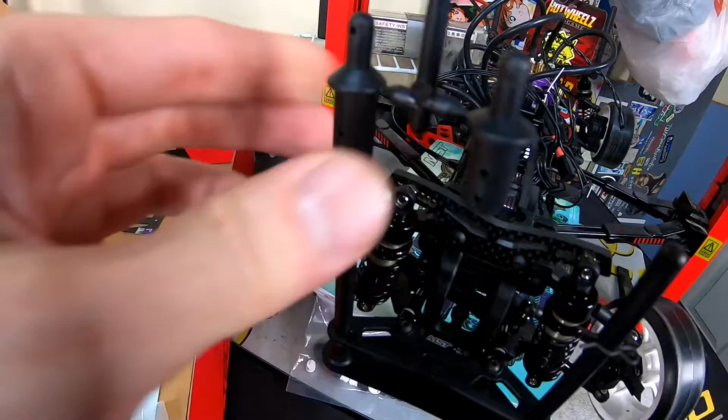The spring pieces I left in there, the spring cardboard. Those are the body post things - I haven't used that, they go on there. Okay, that's it, so that's all the extra pieces. Oh, and this is part of the servo saver. This is the 16.5 servo horn, we don't use that. And that's it.

So yeah, Constructor's Digest complete. I hope that could help you with your build and all that, or pass it on to a friend.

And yeah, the MRX GT, it's really nice, I love this car already. So there's going to be lots of video of this, comparisons, and all that stuff. And I might even convince some people to buy one, or reconvert people back to MST. So we'll see. I'll do a comparison with it to the RMX 2.5 as well - they have the same shocks and the same adjustable things. So yeah, very excited.